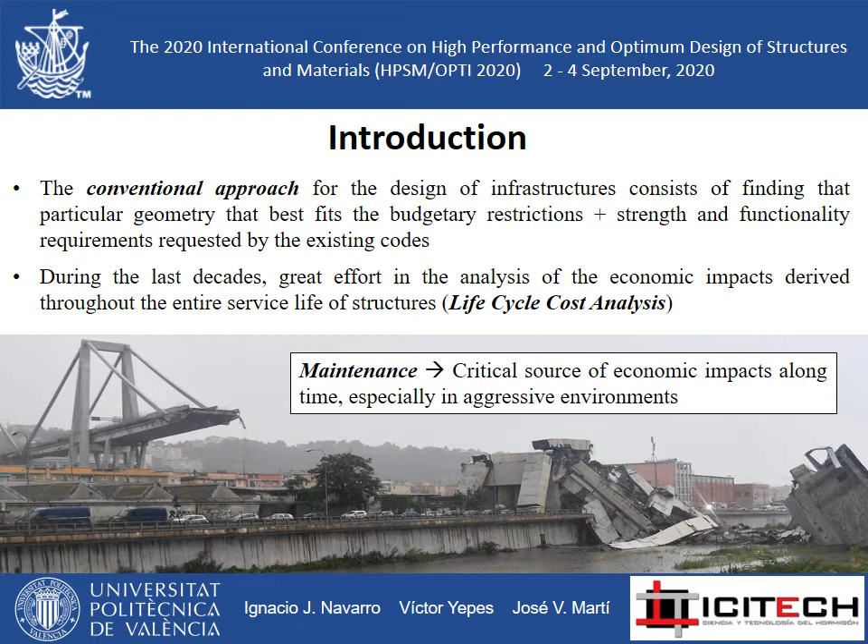During the last decades, the scientific community has put great effort in the analysis of the economic impacts throughout the entire service life of structures, thus assessing structural designs from a life cycle perspective. Indeed, maintenance has revealed itself as a critical source of economic impacts along time, conditioning thus the design of infrastructures in maintenance-demanding environments. However, life cycle assessments from an economic perspective are not enough. The recently established Sustainable Development Goals claim for a paradigm shift in the way structures should be conceived.

In recent times, research has been conducted on the evaluation of the environmental impacts associated to the service life of infrastructure. The inclusion of this dimension in the economic assessments has allowed designers to find solutions that fit better the sustainable future that the society demands. However, an adequate sustainability design requires the simultaneous consideration of each of the three dimensions on which sustainability relies, which are not only economy and environment, but also society as well.

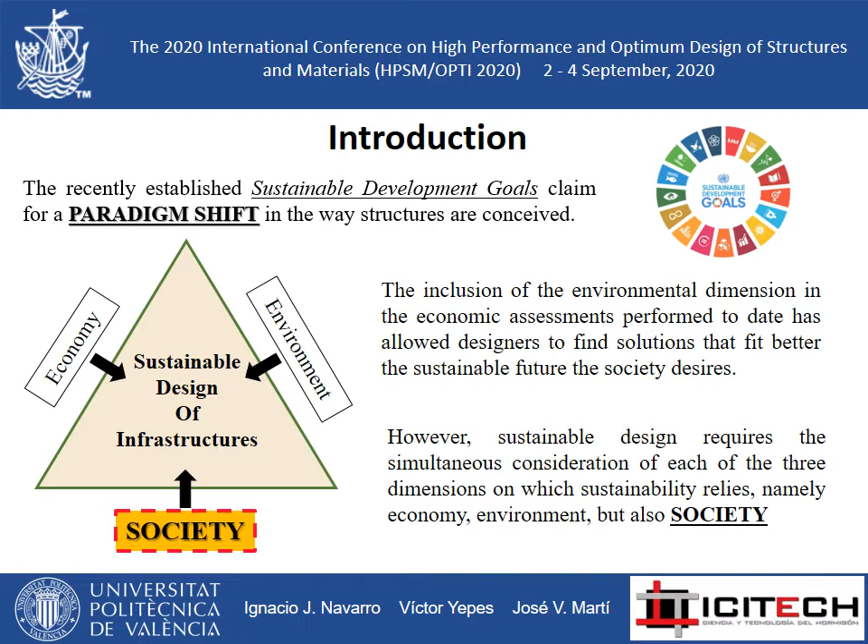But to date, less attention has been paid to the assessment of the social impacts related to the design of infrastructure. This communication aims to analyze how the inclusion of social aspects in the life cycle sustainability assessment of bridges in coastal environments can condition both the selection of materials as well as the maintenance strategies to be followed, leading to more sustainable solutions if compared to those obtained through conventional assessments.

This study focuses on a prestressed concrete bridge deck located in Galicia, in Spain. This bridge is located in a coastal environment and has a continuous box girder deck, as you can see in the figure. The baseline design, which is called REF hereafter, is assumed to have a passive reinforcement amount of 100 kg per cubic meter, with a concrete cover of 40 millimeters. This baseline design is based on a concrete mix with a cement content of 350 kilos per cubic meter of concrete and a water to cement ratio of 0.4.

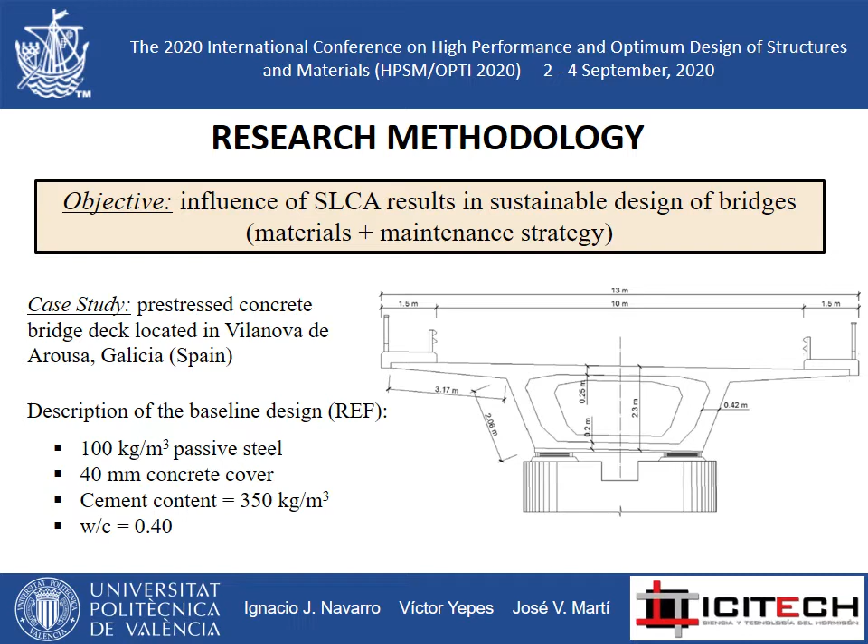Besides this reference or baseline design, 6 alternative designs are studied here which provide better durability performance in chloride-laden environments, as the one assumed here. As a first alternative, the water to cement ratio of the reference concrete mix is reduced from 0.4 to 0.35, so as to increase the concrete cover resistance against chloride diffusivity. Other alternatives are evaluated where particular materials are added to the baseline mix. These alternatives consist of adding 10% silica fume, 20% fly ash, or 10% latex.

The durability of concrete structures in coastal environments can also be improved, obviously, by using corrosion-resistant steels, so here a design alternative considering stainless steel reinforcement is analyzed. At last, the performance of hydrophobic surface treatments applied to the deck surface is also evaluated. This table shows the concrete mixes considered for each design. It shall be noted that the concrete mix for the alternatives INOX and HYDRO is the same as the baseline mix.

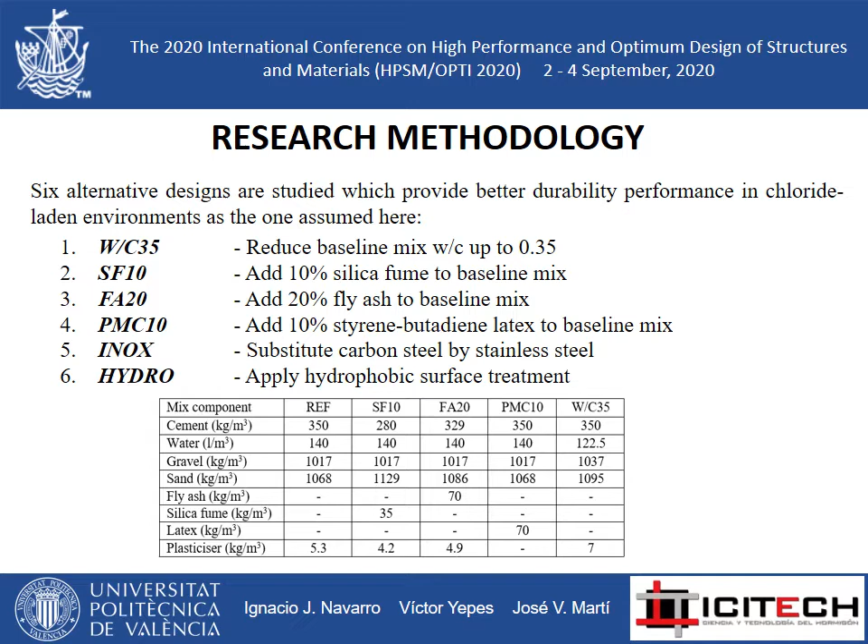This analysis is a life cycle-oriented study, which considers as a functional unit a 1 meter long section of the bridge deck under study over a 100 years time span. A cradle-to-grave life cycle approach is assumed here, including the impacts that result from every activity required to guarantee a 100 years long service life of the deck.

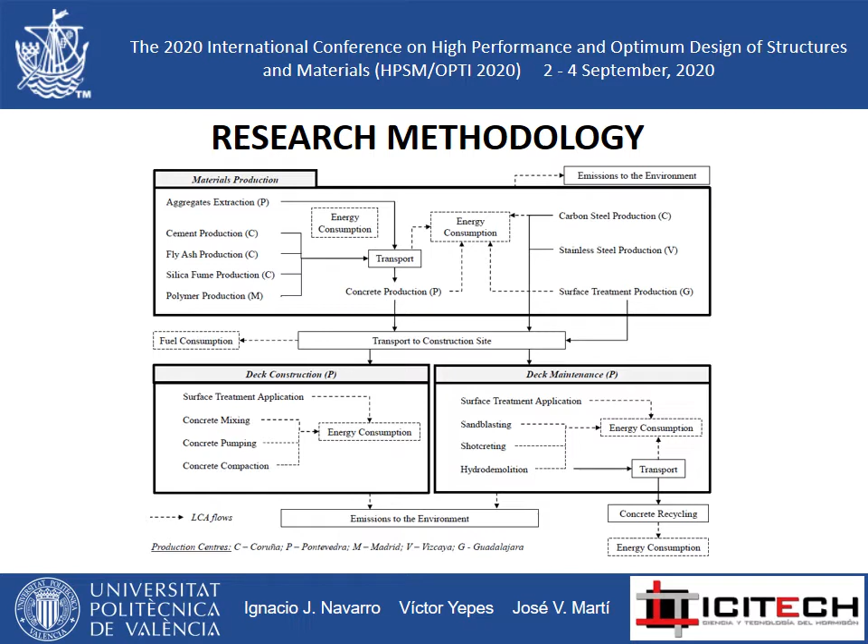Therefore, the system under analysis covers from the resource extraction and production of the different construction materials associated to each design alternative under evaluation, up to the demolition activities at the end of the life of the bridge. The system under analysis also includes the maintenance activities required by each of the alternatives depending on their durability performance against chlorides. To evaluate the advance of the chloride front in concrete over time, a two-dimensional version of the Fickian model proposed in FIB Bulletin 34 has been used.

The particular values of the durability parameters of each design alternative are given in the table shown here. On the basis of these values, the failure probability at any time can be evaluated by means of Monte Carlo simulations, considering that failure occurs when the chloride concentration exceeds the critical chloride content at the depth of the rebar.

Maintenance is considered here to be mandatory always that the reliability reaches the limit reliability. Here, a limit reliability of 1.3 has been considered. Maintenance can be optimized by finding those intervals below this limit interval, which result in life cycle sustainability responses that are maximized.

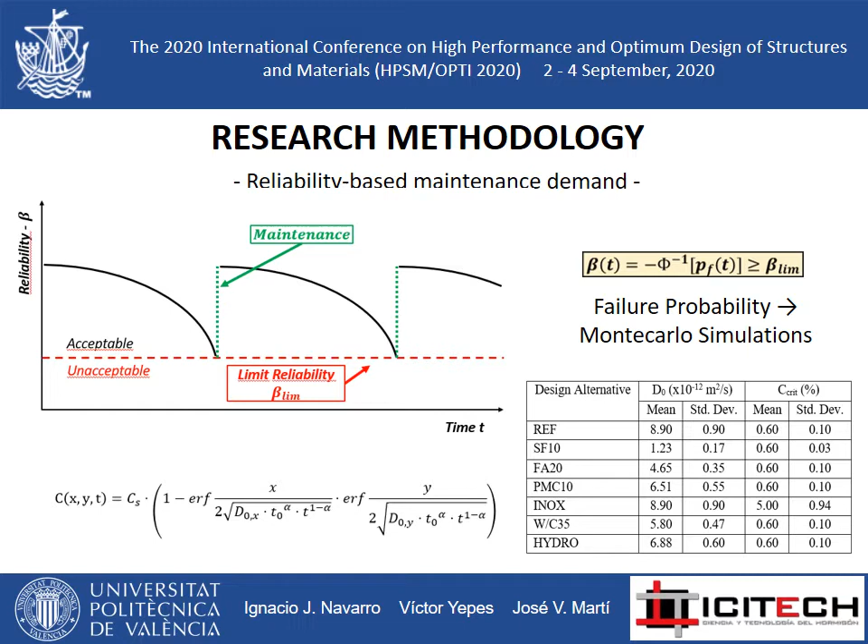For the impact assessment of the economic dimension, two impact categories have been considered, which are the costs during construction of the bridge deck and the discounted maintenance cost over time, which will be dependent on the maintenance demand. In this assessment, a social discount rate of 2% has been chosen to discount maintenance costs.

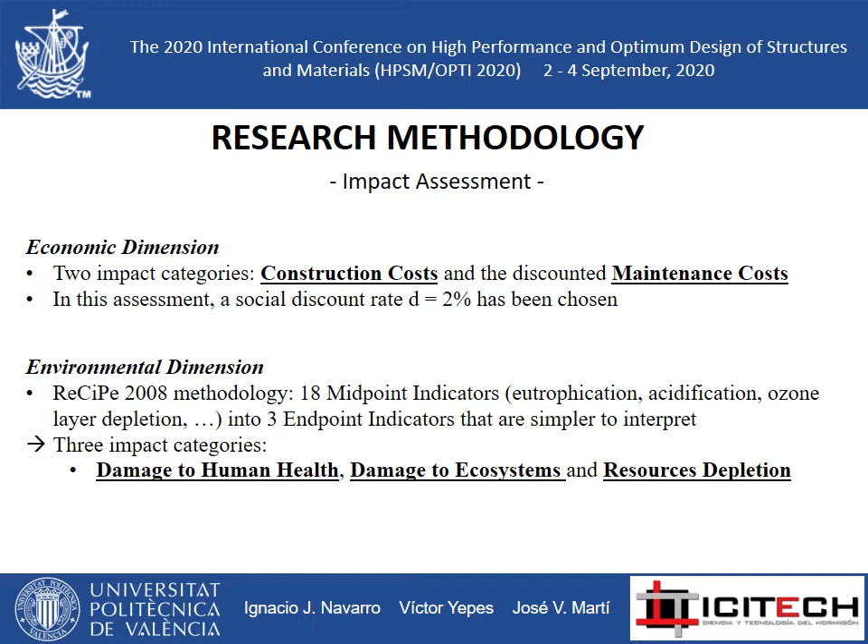The environmental dimension has been assessed by using the ReCiPe 2008 methodology. This methodology translates 18 midpoint indicators into 3 endpoint indicators that are simpler to interpret. Those endpoint indicators are considered here as the 3 impact categories assumed for the impact assessment, which are damage to human health, damage to the ecosystems, and depletion of resources.

The social dimension has been assessed following the methodology proposed by Navarro et al. in 2018. This indicator-based methodology considers 4 social impact categories associated to bridge infrastructures here in Spain, which consider the workers and the generation of employment, the economic development of the regions as a result of the economic investments in the different production centers, the impact on the users of the bridge deck, that means travel delays or reduction of travel safety resulting from maintenance activities, and at last, the public opinion.

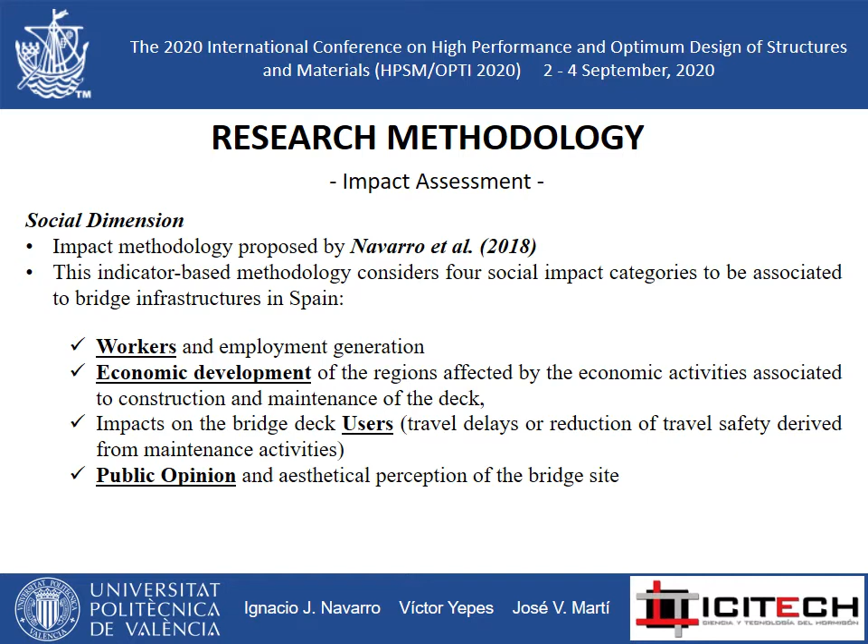To perform the life cycle analysis, data has to be gathered in a phase that is called the inventory analysis phase. The environmental data has been obtained from the EcoInvent 3.2 database, combined with specifications of manufacturers associated to the different energy demand and performance of the machinery involved in the different activities. The social data has been gathered directly from the Spanish Tax Office and the Spanish National Statistics Institute. And at last, the economic data has been obtained from construction-specific databases.

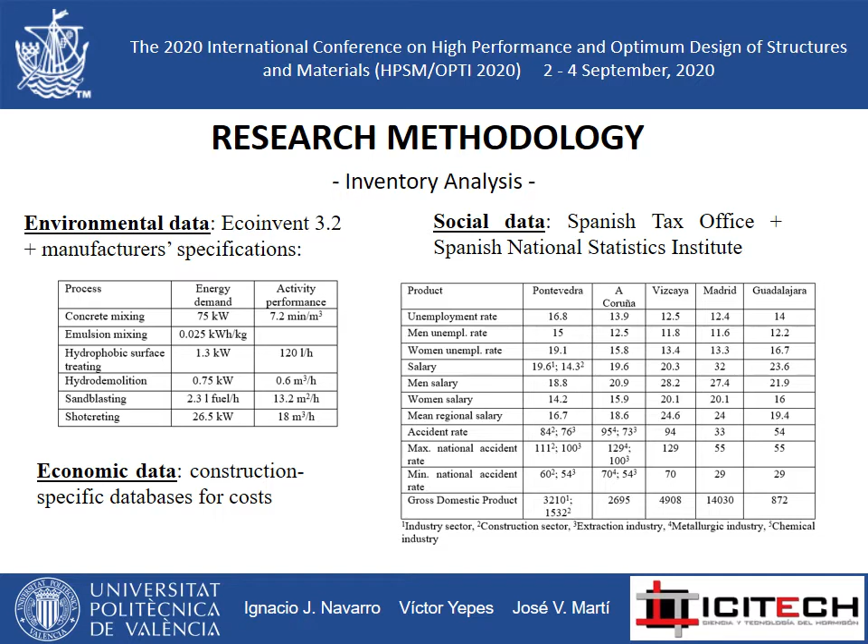The sustainable design of infrastructures can be considered a multi-criteria decision-making problem. In this case, the TOPSIS methodology has been used to assess sustainability. This methodology seeks the solution that lies closer to the positive ideal solution, while being simultaneously sufficiently far away from the worst solution. In addition, in this case, the relevance of each criterion has been obtained by means of the analytic hierarchy process, the AHP.

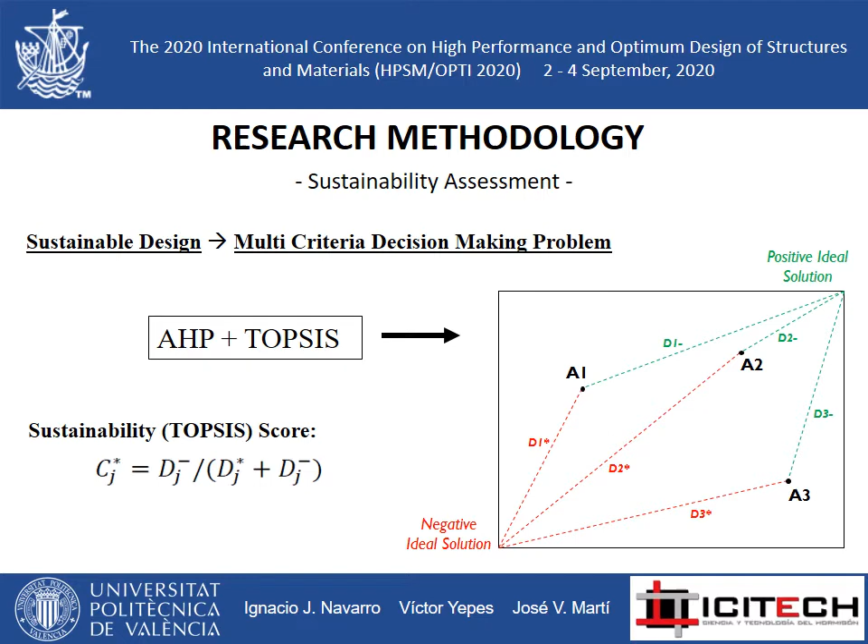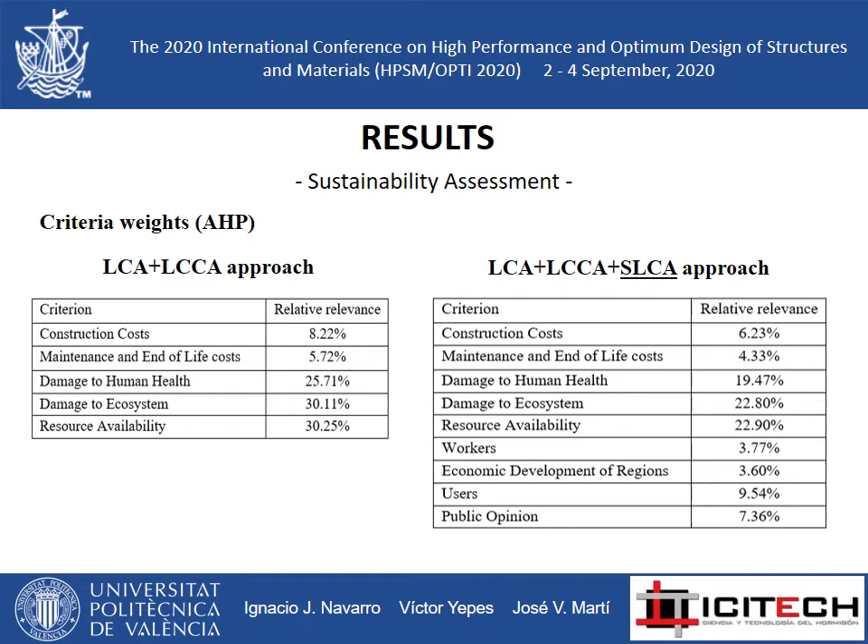So now we will talk a little bit about the results obtained. First of all, I would like to talk about the relevance of each criteria. A group of experts has been consulted to determine the weights via AHP to be associated to each criterion by using this technique. Two cases have been studied, namely the two-dimensional and the three-dimensional approach, each of them providing different criteria weights. Those weights are shown in those two tables presented here.

So what about the life cycle results of the first two-dimensional approach, which would be a conventional approach nowadays? It is observed that the preferred design is the alternative hydro. This has resulted in the best life cycle performance, both in the environmental and in the economic dimension individually. Although it requires to be reapplied every 5 years, it is a very competitive alternative in terms of costs. In addition, this reapplication does not require the production of additional concrete for the replacement of the concrete cover. So it results in very low

environmental impacts. On the contrary, the worst life cycle performance is that one associated to the baseline design. Such design shows bad durability and results in excessive maintenance demand along the analyzed 100-year service life. Such demand results in great environmental impacts resulting from the material needs, as well as in great economic costs associated to each maintenance activity.

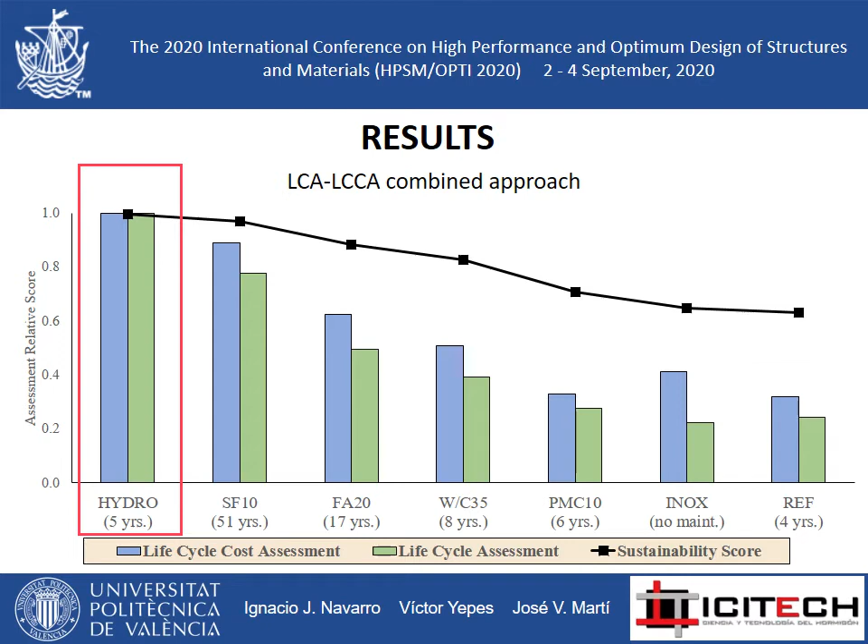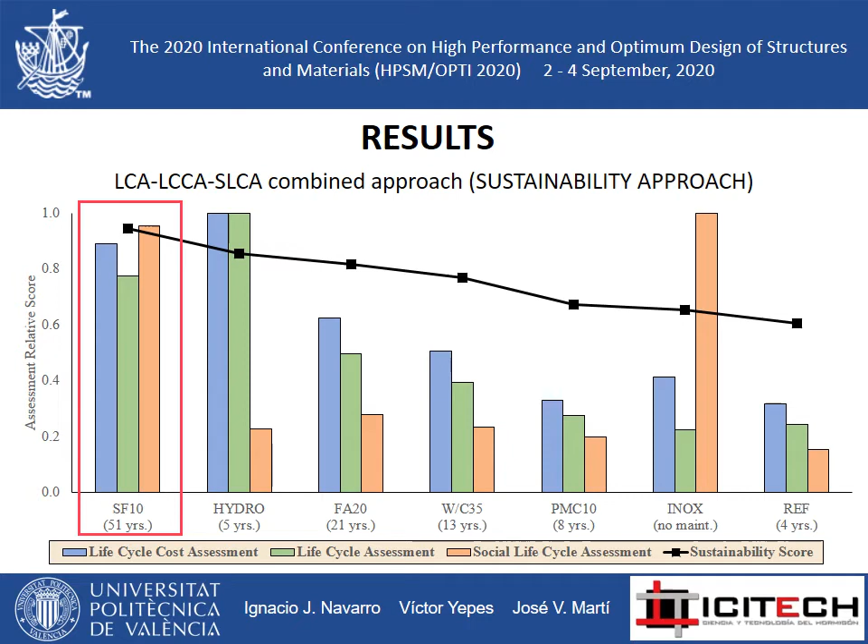Here you can see the results of the proposed three-dimensional approach, which includes the social dimension. Here we can see that in this case the preferred solution is the one based on the use of silica fume. On the contrary, the reference or the baseline design continues being the worst solution. So if we consider the three sustainability dimensions simultaneously, it shall be observed that the design performing best along its life cycle is the one based on the use of concrete with silica fume, as we have seen before.

This solution, although scoring less than the design based on hydrophobic surface treatments on the economic and environmental assessments individually, has a much more balanced response when adding the social dimension. Consequently, the sustainability score of this design is 11% greater than the sustainability score of the alternative hydro, which was the best according to a conventional approach.

The need of a periodical reapplication of surface treatments every 5 years incurs in negative social impacts on the public opinion and the aesthetics of the bridge sites and also on the infrastructure users, thus resulting in bad social scores that can be observed in the figure here. On the contrary, the maintenance-free alternative based on the use of stainless steel results in the highest social scores, as the public opinion and the users of the infrastructure are benefited from the structure to remain unaffected along its entire service life.

From the results observed in the three-dimensional approach, it is observed that the optimum maintenance interval for some of the designs has changed when adding the social dimension in the assessment. In particular, it is observed that these optimal intervals have increased. This is due to the fact that the social positive impacts on users and on the public opinion are benefited from reduced affection of the structure along time.

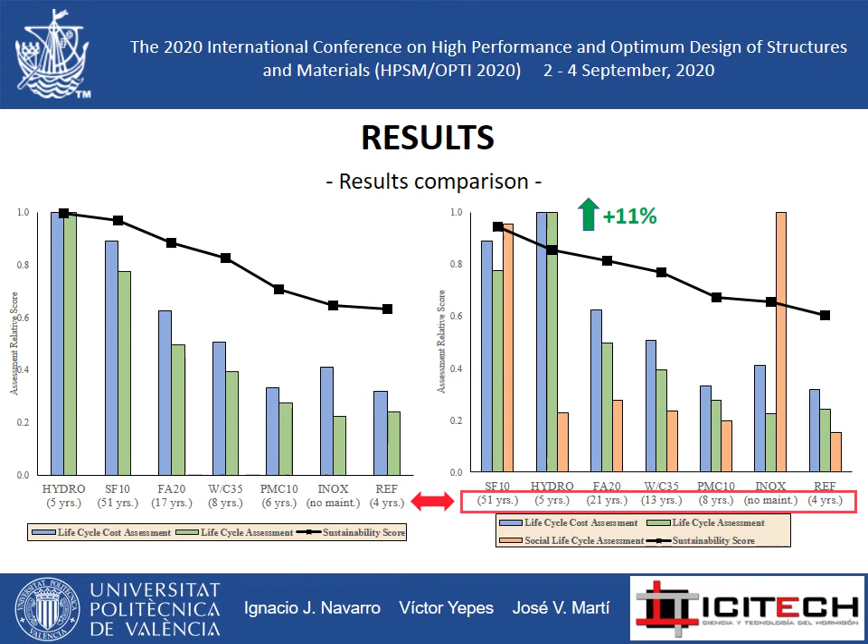At last, we will have a look at the main conclusions of this study. The main conclusion would be that conventional two-dimensional sustainability assessments of structures based on the sole consideration of the economy and of the environmental impacts are not enough to properly catch the holistic scope of sustainability. So including the social dimension in life cycle assessments results in optimum maintenance intervals that are increased if compared with the conventional approaches.

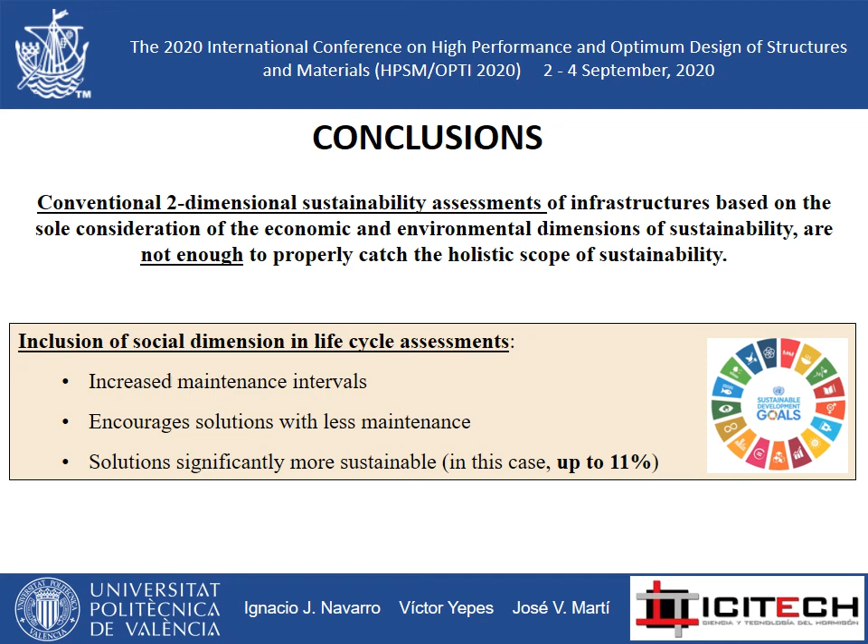It is observed that solutions with less maintenance are encouraged, and that solutions might increase significantly the sustainability response along time. In this case, we have observed that the solution with silica fume has a sustainability score of up to 11% greater than the best alternative resulting from a conventional approach.